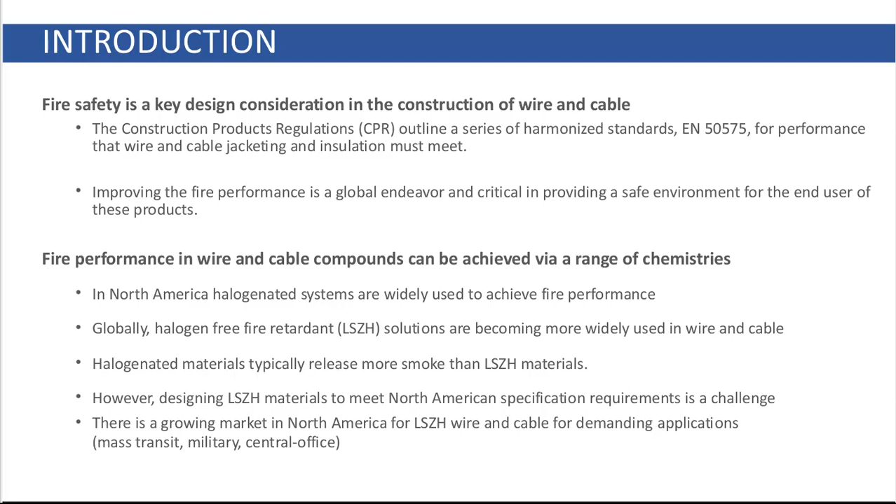And a lot of that has to do with 5G. Please do not believe the rumors that 5G is in any way related to coronavirus - I don't want to have to address that. But as we roll out more 5G networking, the density of the fiber and the amount of fiber is going to increase drastically as we put in these nodes to attain high capacity, high data rates, all in a very dense area. That means there's going to be a lot of cable being put in, and frankly, a lot of new material is going to be needed to address safety concerns.

So the large-scale testing for these materials, like CPR, FT4, FT6, plenum is not really for this style of material, but still relevant in the future, can lead to some high costs for manufacturing companies as well as companies like SACO that are developing these materials.

Most of the cost derived from all of these materials generally comes from the scale of the process. At the lab level, you can do testing on a very small sample and it costs a negligible amount. But the second you want to know exactly how it will perform on a specific cable construction in a certain test, that generally drives the cost up, as well as the timeline.

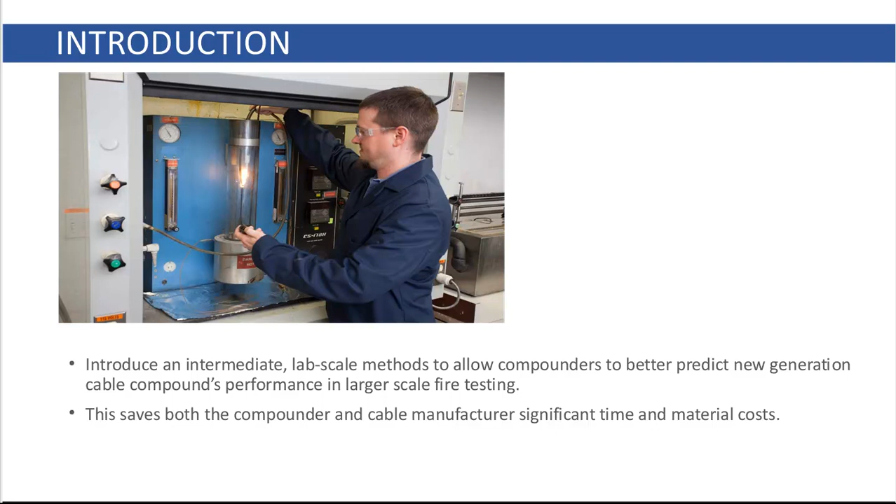So let's take a look generally at some of the harder to hit requirements that are specified in UL-444. Fire performance is the focus of this, but everything also needs its physical properties: tensile strength, elongation, aging, cold bend, LTB, oil resistance, and weatherability.

So this is just an example of when I'm in the lab formulating what I'm looking to hit. There's a couple reasons why, for example, the tensile strength is 400 above the UL-444 requirement. That's so that you can cross it over into other specifications outside of fiber optic. But it's still good to have that headroom so you know a compound will be able to meet all of these specifications, and in case something does go a little bit wrong, you're not living on the teeter-totter edge.

Especially in the lab, SACO isn't the only company that uses mixing bowls, small extruders that don't always scale the greatest to a full-size manufacturing material. There always is going to be a little difference. It's just tuning in exactly how you can circumvent the large shifts in data.

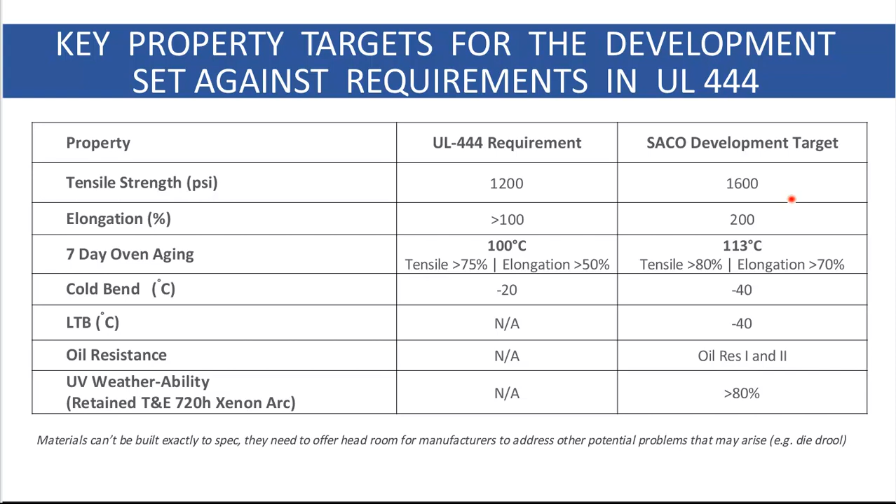So it's important to have that headroom while you develop. We really won't touch much on this other than some of the formulation effects in the future, because this will be primarily focused on the fire performance. So let's touch a little bit on UL-444, as it is the guiding specification for communications cabling, not necessarily always fiber optic, but for comm cable it really is important in USA, and it does overlap with a couple of other specs like UL-1277 for tray cabling.

So low smoke, zero halogen solutions over the past have been comprised of high levels of filler, and those fillers are primarily hydrated fillers - ATH, mag hydroxide, brucite, ground grades, all of that. It's really good, but it also inhibits some of the physical properties above, and to get higher levels you need to find either synergistic minerals or some other ways to just meet char, things like that. We'll cover a little more later.

So this will focus on the thermoplastic compounds. UL-1666, CPR B2ca cabling construction does make a pretty big difference. So I will be telling you a lot about what we've done, the tests we've done at the lab, but at the end of the day, the construction on the final cable can make or break the lab results that we have found.

So we could have something that is the greatest new flame retardant material on the market, but if it is decided to be put on a construction that has a high amount of flammable content underneath a jacket, it may not matter, depending on how the construction thickness and all that plays into it. So I guess what I'm saying is we will do everything we can in our power to make sure you have a very good flame retardant material, but there are ways that can be sacrificed later down the process.

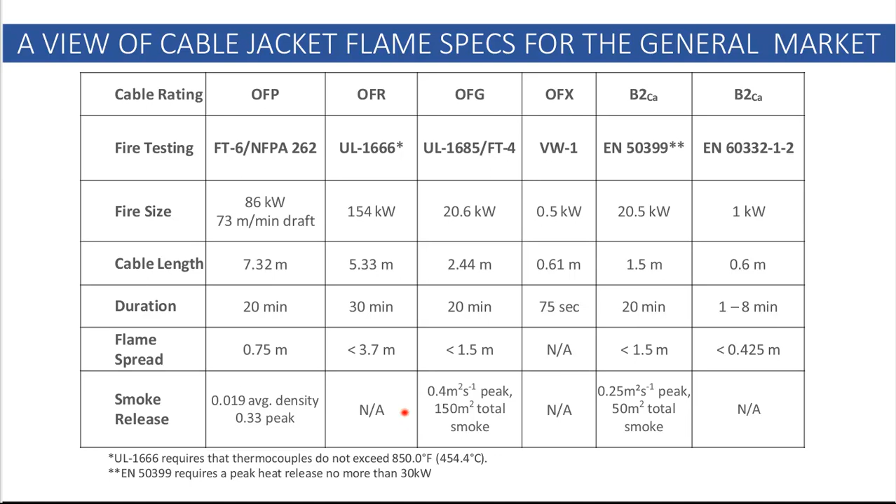So we can come back to that slide if anyone needs to in the future in the Q&A, but just remember that 1666 and the 50399 are often considered very similar, but in all reality, this actually uses a calorimetric equation, while the 1666 uses thermocouples for smoke or temperature gradients.

CPR classes, this is generally how it's broken down. There's additional criteria as well, which comes down to smoke acidity and flaming droplets, which in their own right are very difficult to meet for even low smoke zero halogen compounds. You'd think to yourself, why is acidity a problem for some of these? It just can be. They're very pickled.

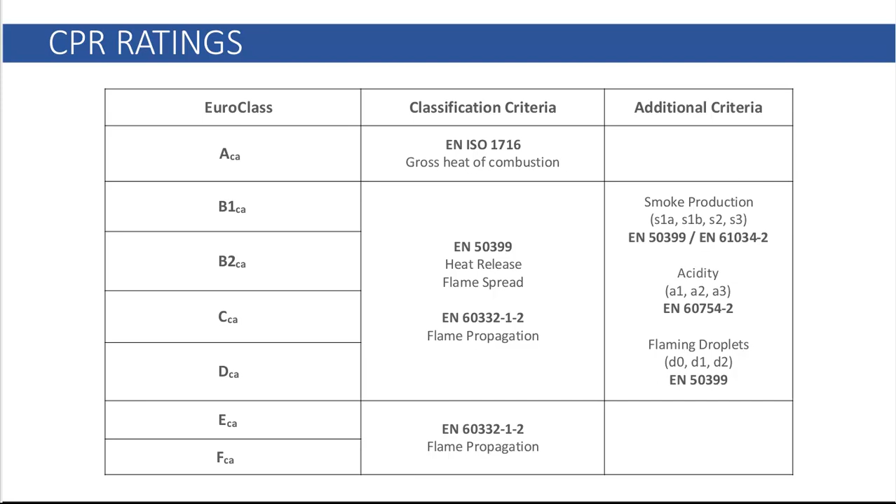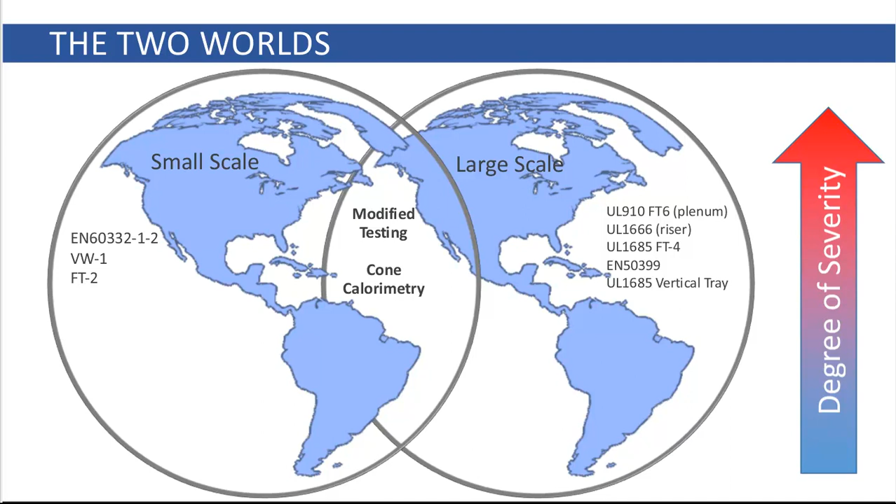So, as I was saying, there really are two worlds that we live in. There's the small scale, which is comprised of the EN60332, VW1, FT2, which are really burner-based tests. I believe the EN60332 uses propane instead of methane, so it is very important that we rank it a little bit higher, as the calorimetric off-gas from that, or not off-gas, but the quantity of energy is a little bit higher. On the right is the large scale, the things that we can't really do in the lab without making cable and really trying to meet some of the full progression testing requirements. So that being said, there has to be some middle ground to verify that what we are making is consistent with the large scale. So that's where modified testing and calorimetry come into play.

As we progress through this study, we're going to need to understand a few things because there's going to be a large data set revolving around 6 samples. So we have a classic MDH style formulation, well, 2 of them actually, which just vary a bit based on the MDH load. The resin generally is EVA blends, but it is the same level of EVA.

ATH, we have one of those just to drive home a point that ATH doesn't always perform quite as well as MDH, but there's a cost benefit. And then there's also a proprietary list of samples which SACO has come up with in the past few years just to show the advancements that we've made. Not all the data sets are complete, and that is just based around the innovation path that we choose.

So if you look on the right, one more final piece that might be interesting for people that aren't quite as familiar with the industry. This is what I view as a classic system: EVA, LLDPE, coupling agent, and MDH, and then a little bit of antioxidant to balance out and make sure that you're not degrading your polymer.

So for those that aren't as familiar, coupling agent is probably the only thing that really is a little more questionable. Think of it as when we put in these filled hydroxylated metals, they don't really blend. It's oil and water. Coupling agents make sure that the LLDPE and the EVA play a little better with the MDH. They blend, they don't reduce the physical properties, they kind of just mesh better together.

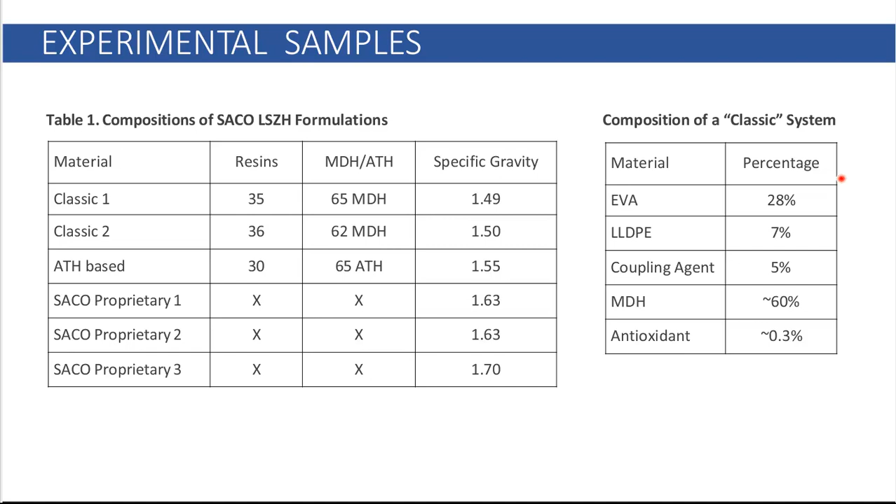So, the first thing people think of when we dive into research and study of new formulations is LOI. And it's really for a good reason. It's fast and it's easy, it doesn't require a lot of construction, it's overall cheap. The largest issue with LOI is if you remember back to the days when you were sitting in your classroom and the fireman was telling you, all right, this is the fire triangle: oxygen, fuel, heat, you need all three, take one away and it won't work. Well, LOI only focuses really on the oxygen source. Heat is consistent and the fuel is generally consistent. So it's a little bit skewed.

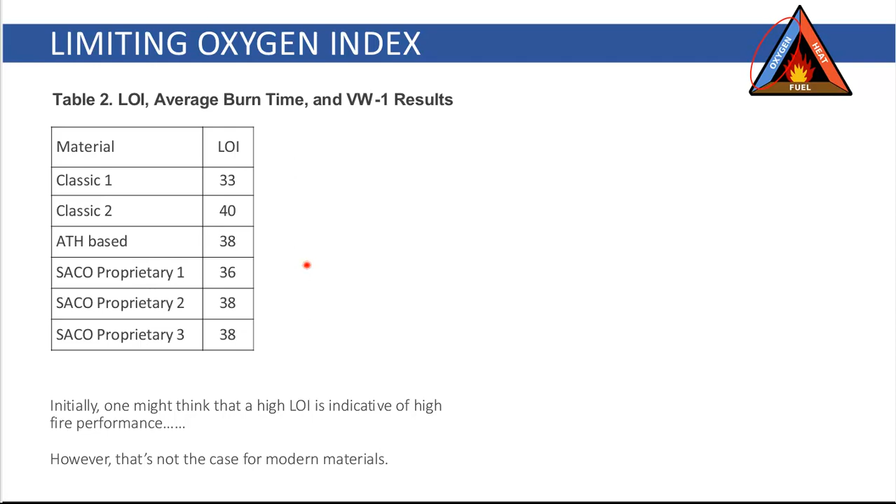So if we just look at this slide, you would think, wow, Classic 2 has really, really good fire performance. We should go forward with that. We'll use that for a new B2ca certified cable. Well, in all reality, if you look at the VW1 results, the propagated flame testing, it doesn't always play out that way. If you were to expect that LOI was going to be indicative, you would think that this VW1 point would jump up and then it would drop. It would really just be continuously following this at a slightly higher level. That's not what we see. Obviously, with some of the new proprietary materials, the VW1 burn time is significantly lower, even though the LOI is not as stellar as the 40 that's displayed as the Classic 2. So it just kind of points out that there are some flaws in LOI, and that can lead to some false conclusions. So you just have to be careful.

A lot of this comes down to the actual propagation mechanism that is behind the VW1 test. So if you were to hold a candle from the bottom, it's easy, right? You're not burning your hand.

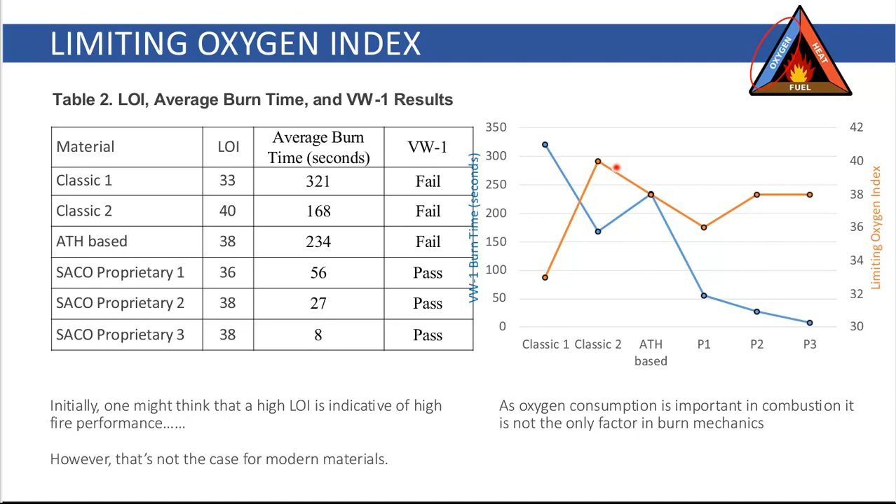But if you were to move the same distance up above the candle's flame, you'd burn your hand. It's the same concept in a wire. You get the burn at the bottom, it propagates up, and the heat and little radicals essentially continuously attack the plastic as it goes up. It can also lead to a candle wicking effect, as it's often called.

TGA is a supplementary technique, often not really thought of. It's a little bit tricky because you can cheat this as well using non-combustible materials, inorganics that stay behind. But that method also has its drawbacks. You would see it in LOI.

If you look at the TGA chart, I can't display the full thing because people that are very gifted can understand exactly a formulation head to toe by looking at a TGA. But mass remaining is very important. Think of TGA as being able to tell you, alright, we've burned this cable, how much will remain on that cable if it's formulated to resist the forces of gravity and laminar flow from heat. But it's a good indication of fire performance in its own right, as you see in the proprietary materials, which also had the really low VW1 burn time.

It's just, think of it as more thermal insulation than you would get if you had less material on the cable or wire. So VW1 is something that's always been a little iffy for passing for low smoke zero halogens, but the proprietary methods correlate quite well with TGA on their passing in VW1 testing.

Okay, so here you go. This is a little more in line with what you would expect. They're completely inverse. So high amounts of VW1 burn time mean there's generally not as much mass remaining from the TGA.

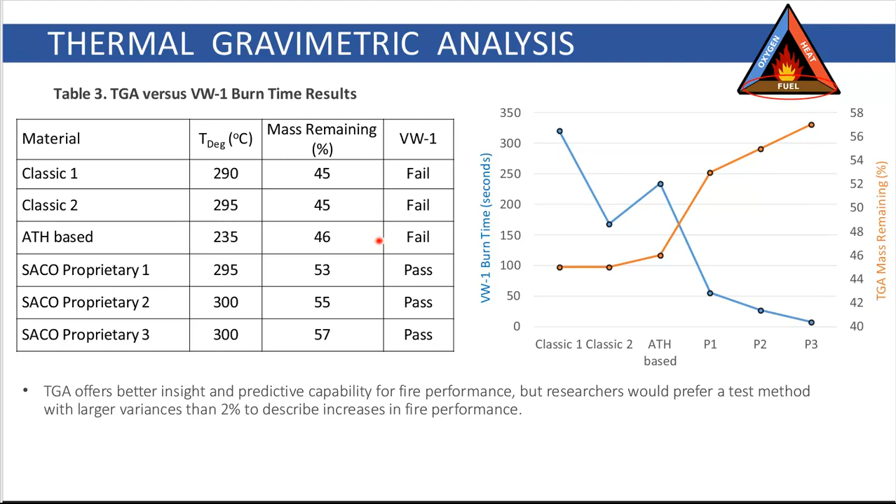Actually, I should elaborate a little bit before I move on to the next slide. When we do TGA, unless we are looking for something very specific under oxidative conditions, we generally use nitrogen until 600 degrees Celsius, and then switch to oxygen to burn off any additional carbonaceous layers. The purpose for this is, under nitrogen, it's a much smoother transition between materials that evolve gases. So you get a very consistent thermogram every time you run it under nitrogen compared to oxygen, which can have tricky oxidative effects.

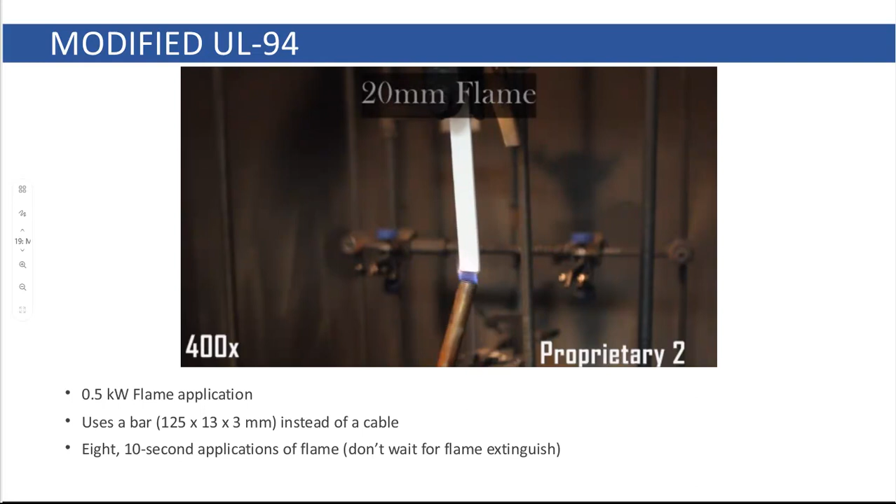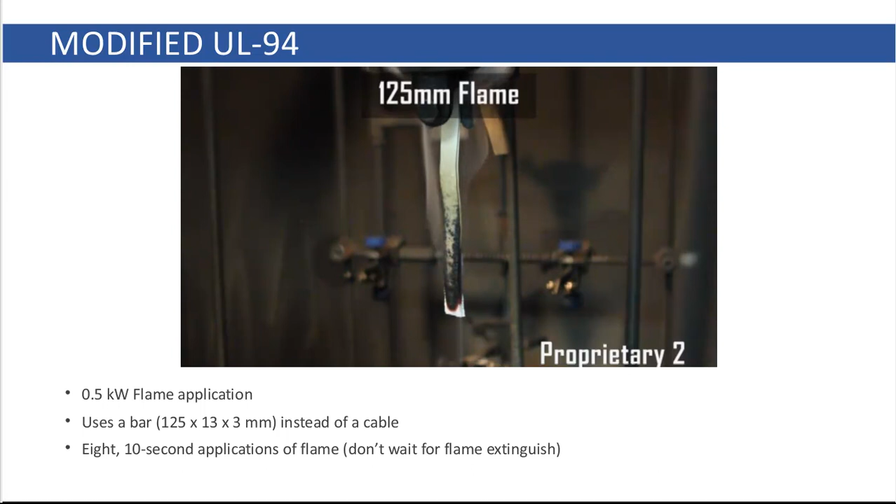So something we've done recently, which isn't entirely our own idea, is a UL-94 style testing, modified is what we're calling it. It consists of 8 ten-second applications with a ten-second spacing in between each of the burns. You don't wait for the combustion to stop. In fact, if you do, generally some of the higher flame retardant materials behave similarly, so it's hard to tell the difference between them.

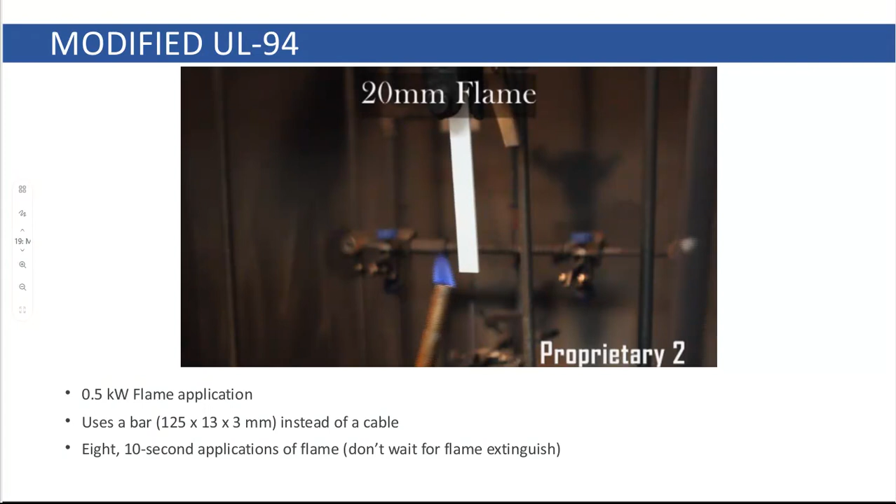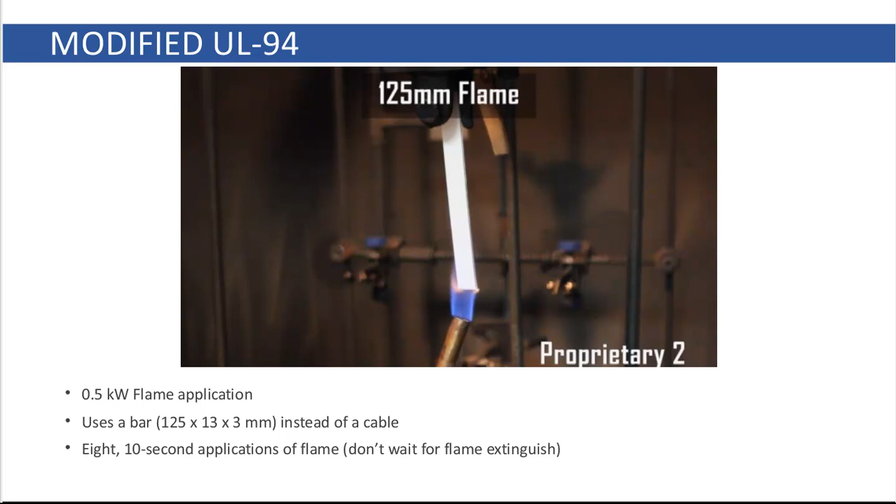You can see in this video the role that the formulation actually plays. These are the exact same thickness. The proprietary materials hardly burn up. They char along the edges. You don't wick up the sides. It's an effect of both the TGA that we saw, as well as some of the actual flame retardant properties that we'll see in cone calorimetry in the future.

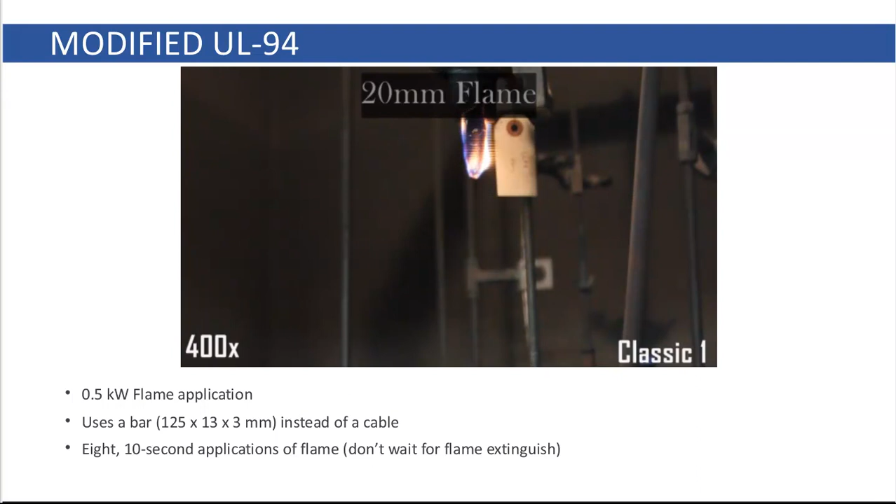But really what you're looking at is a relatively successful modified UL-94 burn compared to what you're seeing now, which is the classic material. That's the higher filled, just MDH, EVA, LDPE, and a coupler. So really what that's showing is once you put that on a wire, it's capable of high levels of flame performance all on its own.

And that is a very important piece to take away from the lab. If we can't verify that the material is flame retardant on its own compared to what we've done in the past, then it really is a bit of a moot point. So it's difficult to transition to the next level of lab testing.

So there are other companies that use UL-94 style testing. It's a little different than what we've shown here. They'll vary the thickness of the bar. It'll still be 125 millimeters, still be 13 millimeters in its width, but the 3 millimeters will be the piece that they vary. We've done this as well. We've just found that it's easier to use a 3 millimeter, or for the proprietary materials, you can go to 1 millimeter. The thinner you go, the harder it is to pass the test. Thin layers tend to burn better. The oxygen content versus fuel is very important.

So with that being said, coupling the UL-94 with cone calorimetry can be some of the best data that you can get to decide if a material is worth progressing with.

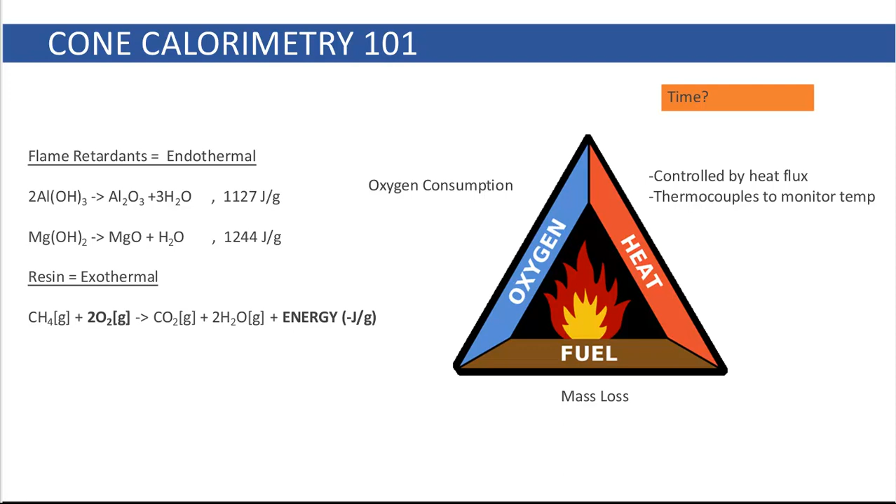So, let's see, can I go to the next? There we go. Most materials for cone calorimetry are going to have the same amount of energy when they burn with respect to oxygen. That's 13.1 megajoules per kilogram. That is the core concept behind cone calorimetry.

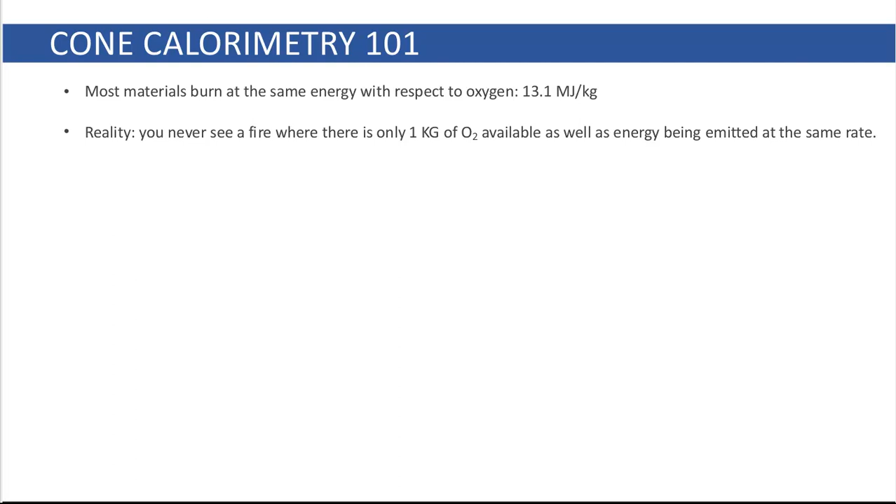Unfortunately, you never see 1 kilogram of oxygen in a burn. That's just not how the world is set up. So someone very smart in the lab once did the work to understand the calorimetric effects of the oxidative degradation of a vast number of materials.

So how this cone really works is when you burn something, it spits the gas out into this piping system, goes through thermocouples, the paramagnetic oxygen detector, gets all of these values. But what it really is doing is determining, all right, at the start when there's no fire, how much oxygen is in this cylinder. All right, there's combustion.

All right, we're going to remove X amount of oxygen, turn it into carbon monoxide, carbon dioxide, and it'll reduce that oxygen concentration. So once you start the test, it'll begin to determine, all right, how much oxygen is left in this cylinder. And that is the basis of the calorimetric conversions.

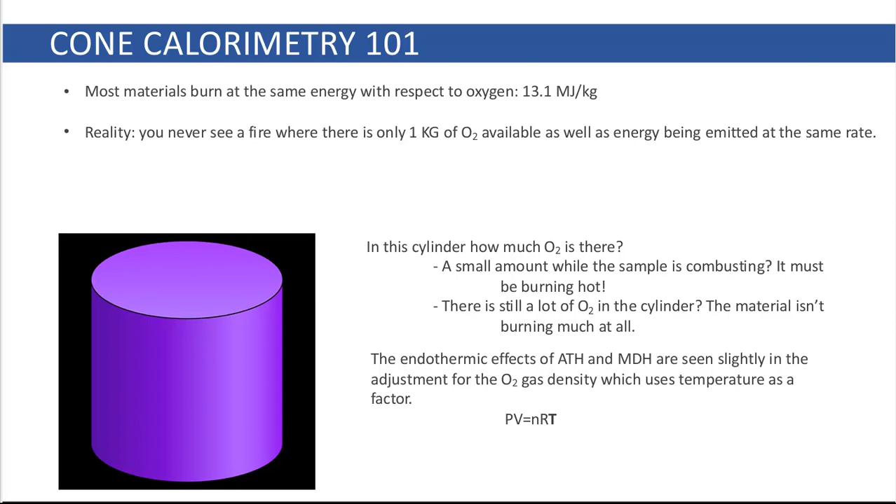So with ATH and MDH, you have a slight adjustment as O2 gas density and temperature factor change. This is just early chemistry laws. So you have to remember to adjust a little bit as we go.

So in a way, it's similar to LOI if you want to think of it that way. There's just a lot more happening as you go around with this testing style. So it'll also provide you the caloric content, ignition time, peak heat release rate, which does come out in some of these larger scale tests, the EN50399 specifically, and the temperature for UL-1666, which is related to the peak heat release rate. Maybe not as directly as some would like, but it's indicative to say the least.

So similar to LOI, it doesn't always predict the flame performance of a cable. This is where char, unfortunately, comes in. As you build a layer of intumescent or non-intumescent char inorganic, it slows down the rate at which volatiles can be accessed by the heat.

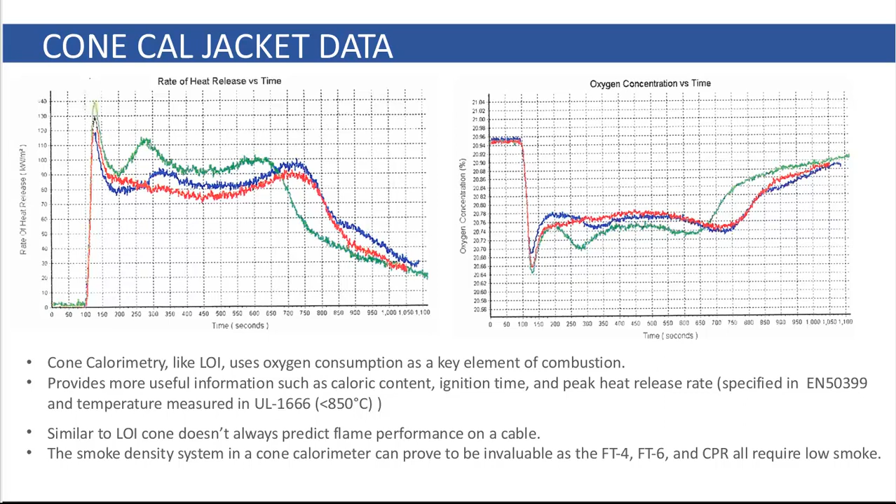This is just an example of some cone data which you would standardly see and what you should expect if someone is to provide you with cone data on a compound. You'll want to know what the peak heat release rate is.

The time to ignition, lower is better for both of those. Average mass loss is good to know because it relates to the amount of material that you are charring. Total heat release rate is more of an overall look versus mass. And then effective heat of combustion and caloric content are the middle ground, where you get both information by mass as well as the caloric content of the material.

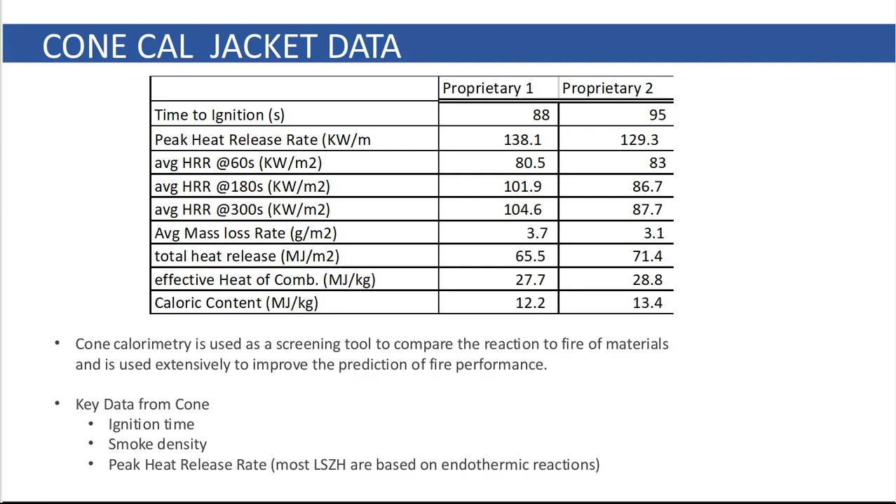So good screening tool, but definitely needs to be paired with the other tests that we provided above to bridge that gap from small scale fire testing to the large scale.

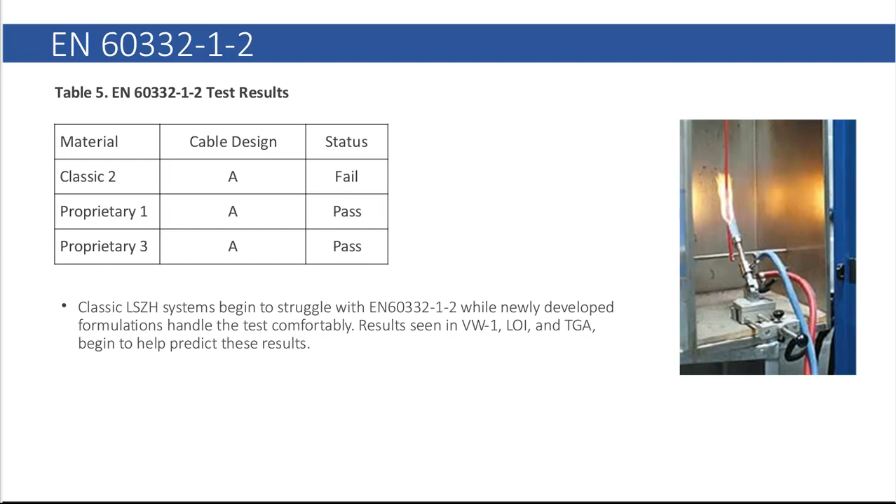So lastly, I guess we can look a little bit more at some of the results from the EN series of testing, and show that with the tests we saw above, you can drive some of the proprietary compounds versus the classics in the right direction. As we evolve to new forms of technology, some of these tests are becoming less linear in comparison. So TGA and LOI don't always equate to the exact same levels of flame performance as they previously did from similar systems. You can't always just say, well historically we saw this, so we'll get a pass. Not really always the case.

And just a reminder again, cable construction does have a large impact on how these materials will perform. We'll work with you guys to get you the best material we can. More than willing to tweak it. Every company will have to do that at some point, and it's really more of a partnership to think of.

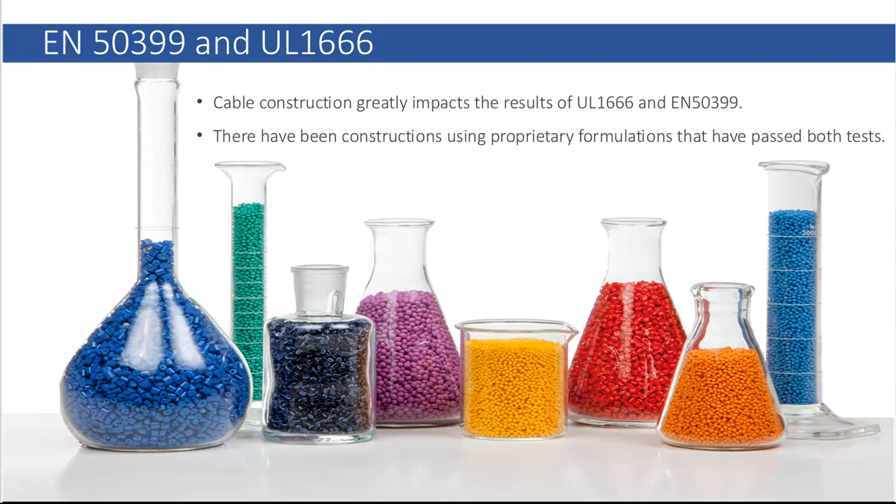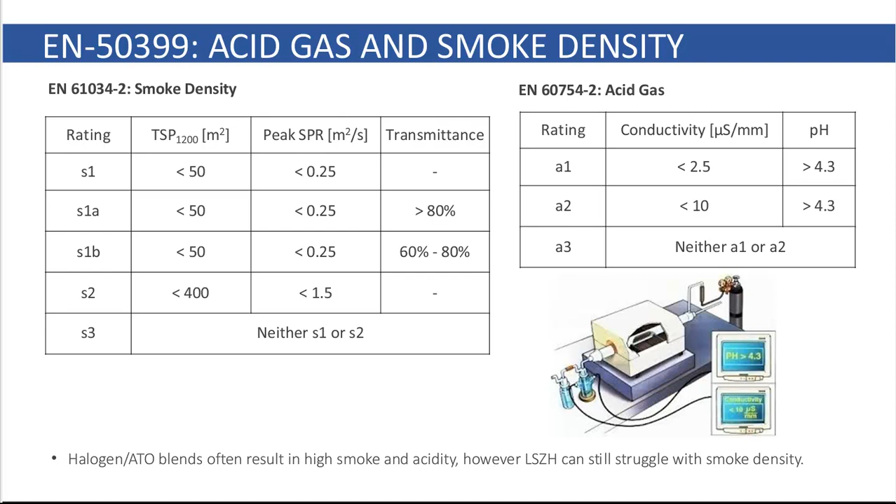So lastly, this is some of the breakdowns on the acid gas and smoke density. Important to know, again, cone calorimetry is useful. Acid gas is in its own realm. If you have an FTIR sensor for cone, you can point it in the right direction, but overall it's kind of hard to predict.

Master table, just to review again, now that we've covered all of the outputs that you get from these testings, how they kind of feed into the flame testing styles that we've got for our major cable designs. So it's a slow transition, and this way is hardest. So keep that in mind.

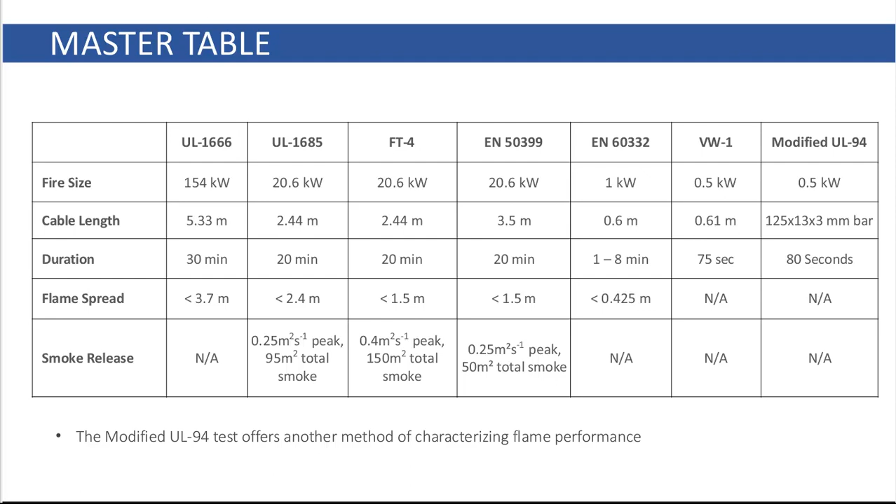This is what I'm proposing. You just kind of work your way up, and as you develop a material, try modified UL-94, VW1, and then pair it with cone calorimetry, LOI, TGA, etc.

The last piece of information that you really need to know while you're tweaking formulations is that everything has its drawbacks. So if I'm going to drop the caloric content of a material, I want to add more ATH, MDH, whatever. That's going to decrease the elongation. It can make the material a little stiffer, and the tensile strength could increase. But there is no gain without a loss somewhere.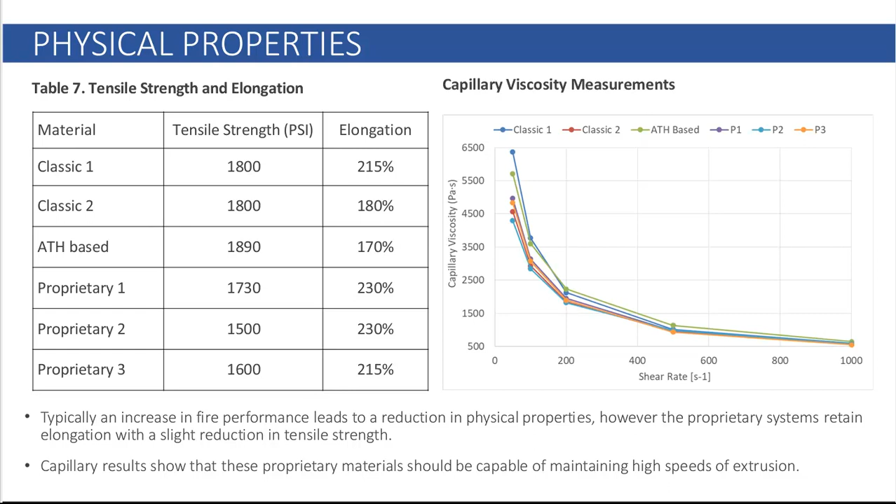If you want to boost the LOI, oftentimes EVA is the answer, and by doing that, you lose some of the low temp properties. Keep that kind of thing in mind. When we tweak a material, there's always going to be some form of drawback. It's our job to bring that to you as quick as we can, and we should have the knowledge to tell you what the change will do.

So in conclusion, we're going to see increased volumes. There's going to be new materials that we'll need to meet some of the more stringent requirements. There are still gaps going from the lab scale material all the way up to a finished cable. So as a community, we need to keep driving new intermediate test methods and trying to get a more linear prediction on how we can develop materials.

But we also have these methods that I went over, which when paired together can give us a relatively good idea. So let's keep driving the cost down on some of these development methods using all of these smaller scale techniques, and get you guys some new compounds.

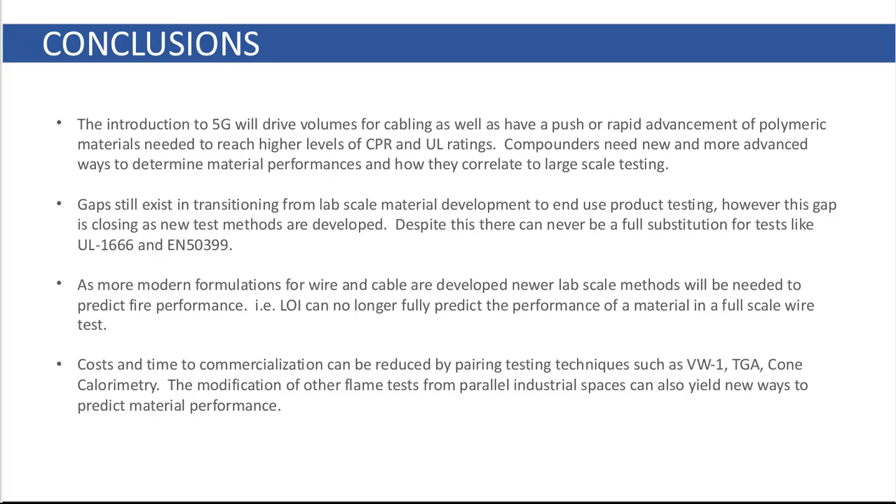Thank you, Ethan. At this time, we will ask as many questions from the attendees as time permits, starting with this first question. For copper conductor cables, I assume the polymer jacket is the major contributor to smoke and toxicity. However, for single conductor FTTH or ADSS fiber optics, how much is contributed by other components, such as polymer fiber tensile reinforcement, ripcord, etc.?

Yes, that is always a factor. A lot of times when you're using constructions, the purpose of the jacket really is to thermally protect and provide safety to the inners, which are quite a bit more conductive or capable of combustion. So it really does depend on the construction, but generally, yes, some of the inners can cause failures. We can expand on that more if you have questions on specific parts of the construction, but I'll leave it there. Yes, it's always a concern.

Okay, thank you, Ethan. Next, have you compared low smoke zero halogen materials to low smoke halogenated PVC materials used in plenum rated cable jacketing? And if so, how does flame spread or smoke generation compare on cables?